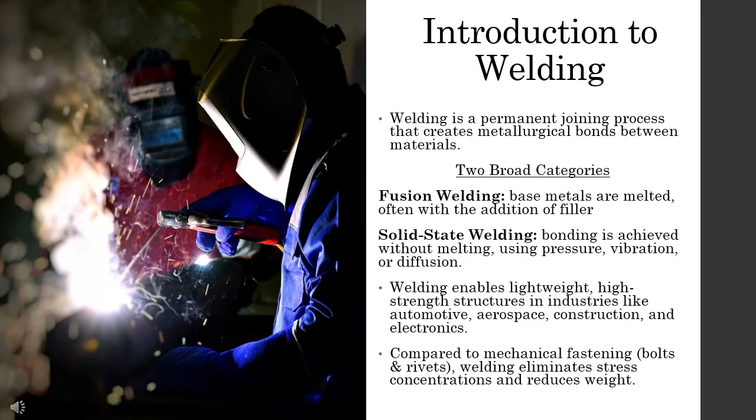The physics of welding revolves around heat transfer and fluid dynamics theory. Heat is transferred via conduction from the welding torch into the base metal, convection within the molten weld pool, and radiation from the arc or flame.

The weld pool behaves like a small lake, influenced by gravity, arc pressure, and surface tension gradients, which is known as the Marangoni effect. Cooling rate is critical, where rapid cooling produces fine grains which are strong but brittle, while slower cooling yields ductile but weaker coarse grains.

Equations help quantify this, where the heat input is Q equals V times I times T, and power density is P equals VI over A. Engineers must also consider the heat affected zone, which often has different mechanical properties than the base metal.

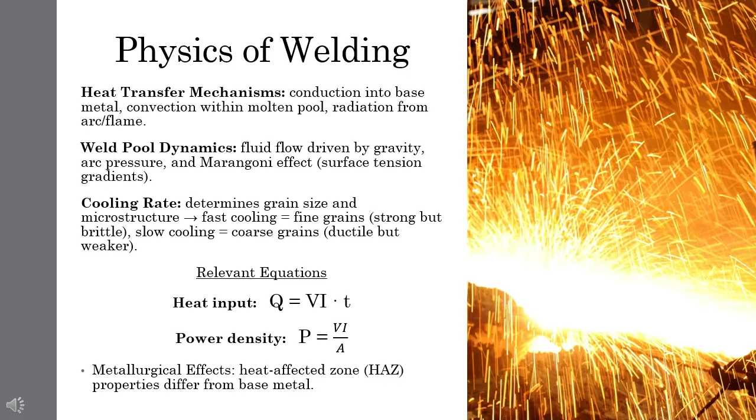Welding processes can be classified by their energy source. Electrical energy powers arc welding processes like stick, MIG, and TIG welding. Chemical energy comes from the combustion of fuel and oxidizer, known as oxy-fuel welding.

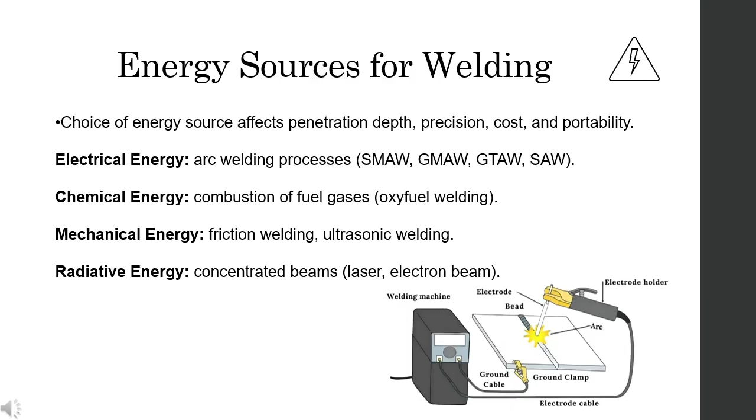Arc welding uses an electric arc between an electrode and the workpiece to generate temperatures between 5,000 and 20,000 degrees Celsius. This melts the base metal and often a filler electrode, creating a very strong joint. Essential components include a power source, electrode, and shielding to protect the molten pool.

Arc welding is the backbone of industrial welding, used in construction, pipelines, and shipbuilding. Its versatility and strength make it the most widely applied category of welding process.

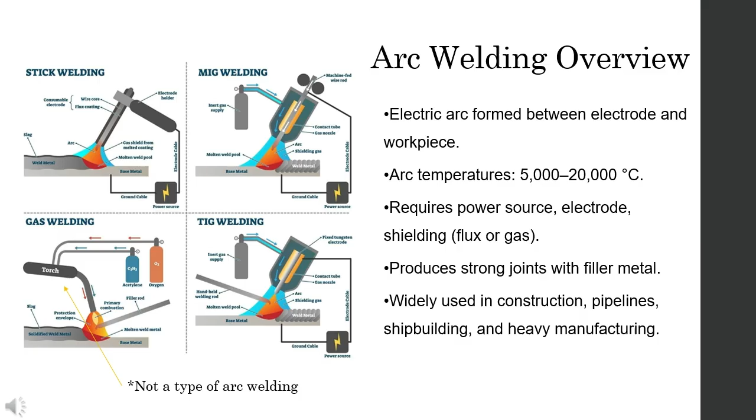Shielded metal arc welding, commonly called stick welding, is a manual process using a flux-coated consumable electrode. The flux decomposes to produce shielding gas and slag, protecting the molten pool from contamination. Its advantages include simplicity, portability, and low cost. However, its limitations are slower deposition rates, the need for slag removal, and reliance on operator skill.

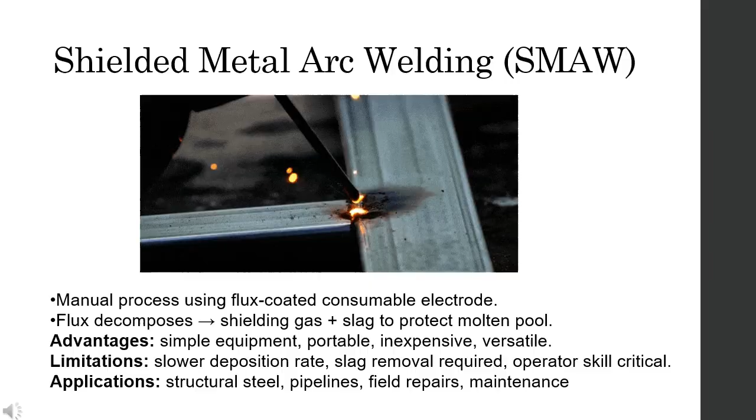Shielded metal arc welding is widely used in structural steel, pipelines, and field repairs where portability is critical. It remains one of the most versatile welding methods despite these limitations.

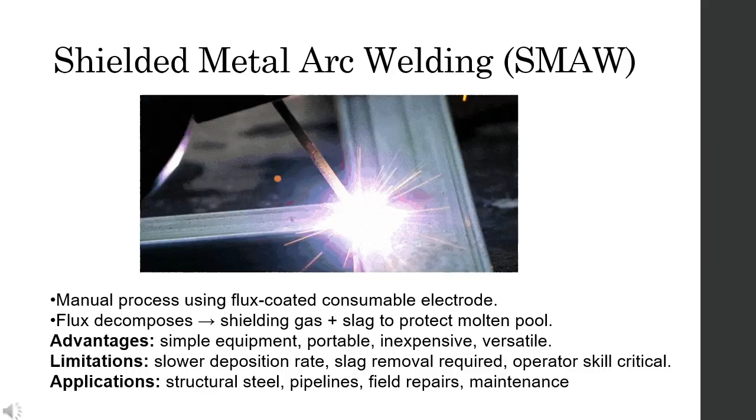Gas metal arc welding, also known as MIG welding, uses a continuous wire electrode fed through a torch with shielding gases applied like argon, carbon dioxide, or helium. Its advantages include high deposition rates, adaptability to automation, and minimal slag. Its limitations are sensitivity to wind, which can disperse the shielding gases, and higher equipment costs.

Gas metal arc welding is ideal for automotive manufacturing and robotics, where speed and automation are essential. It's a clean process that produces high-quality welds in controlled environments.

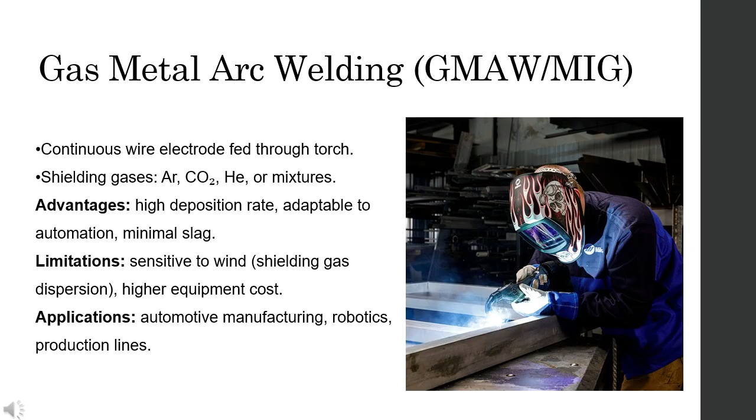Gas tungsten arc welding, also known as TIG welding, uses a non-consumable tungsten electrode with an optional filler rod for thicker joints. It produces clean and precise welds with excellent control. Its advantages include high quality, no spatter, and suitability for thin materials. Its limitations are slower speed, higher costs, and the need for skilled operators.

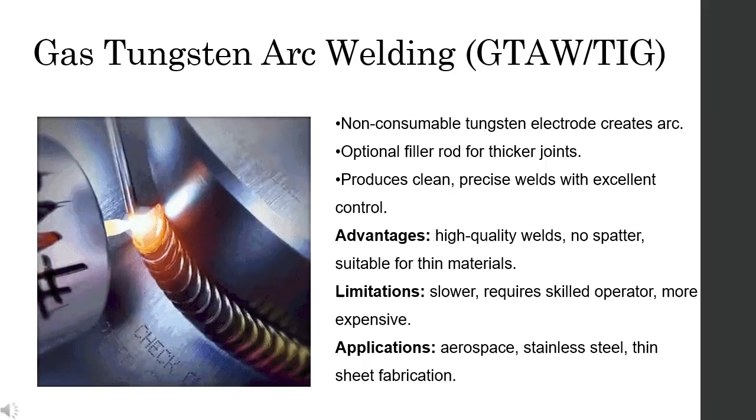Gas tungsten arc welding is critical in aerospace and stainless steel fabrication, where precision and weld integrity are paramount. It's the process of choice for critical joints requiring defect-free welds.

Submerged arc welding involves an electric arc submerged beneath a granular flux layer. The flux shields the weld, stabilizes the arc, and can add alloying elements. Its advantages include high deposition rates, deep penetration, and minimal fumes. Its limitations are that it's restricted to flat or horizontal positions and is less versatile than other methods.

Submerged arc welding is widely used in shipbuilding, pressure vessels, and large structural components where efficiency and strength are necessary.

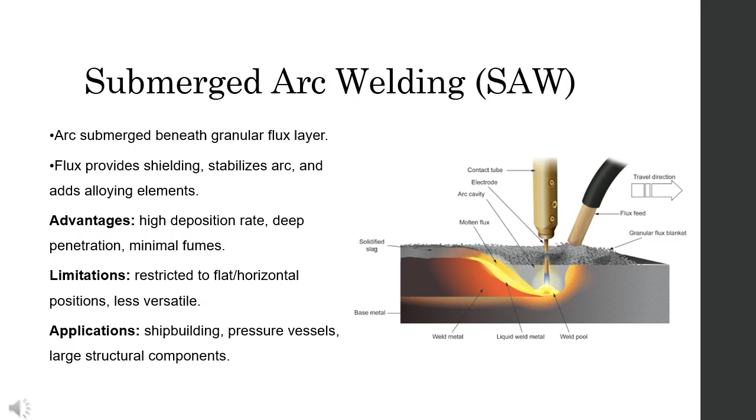Resistance welding generates heat through electrical resistance at the joint interface, with pressure applied during heating to forge the bond. No filler metal or shielding gas is required, making it clean and efficient. It's commonly used for sheet metal joining in mass production applications, especially in automotive assembly lines. The simplicity and speed of resistance welding make it ideal for high-volume manufacturing.

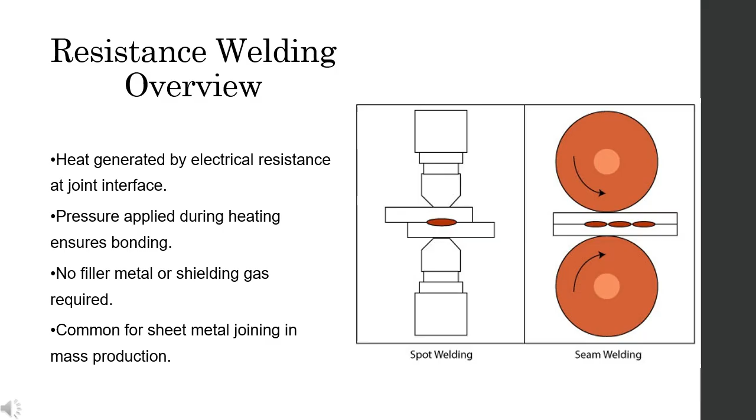Spot welding uses electrodes to clamp sheets or thin objects together while current passes through them. This forms a weld nugget at the interface. Its advantages include speed, cleanliness, and repeatability. Its limitations are that it's only suitable for lap joints and has thickness restrictions.

Spot welding is ubiquitous in automotive body panels and appliances. Those small circular marks on car doors are spot welds, a testament to its widespread use.

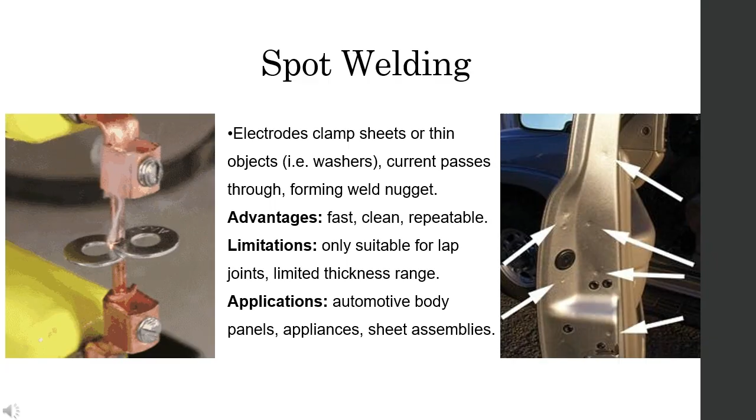Seam welding is similar to spot welding, but uses rotating wheel electrodes to create continuous welds. It produces leak-proof joints, making it ideal for fuel tanks, radiators, and sealed containers. Its advantages include strong, continuous welds and high speeds. Its limitations are that it's mainly suitable for thin sheets and requires very specialized equipment. Seam welding is like stitching metal sheets together, ensuring durability and leak resistance.

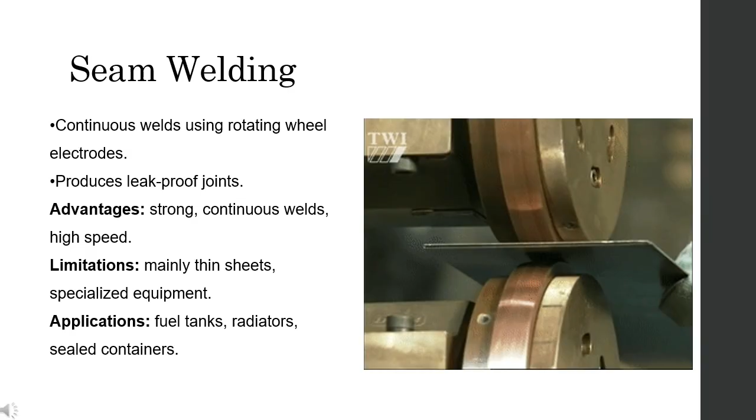Oxy-fuel welding relies on the combustion of fuel gases and oxygen to produce a flame that melts the base metal and filler rod. Flame types include neutral, oxidizing, and carburizing, each affecting the weld's quality.

In oxy-fuel welding, flame control is critical. Too oxidizing can cause brittleness, while too carburizing can introduce carbon contamination into the welds. Oxy-fuel welding is a versatile and portable welding process used in repair work and smaller scale fabrication applications.

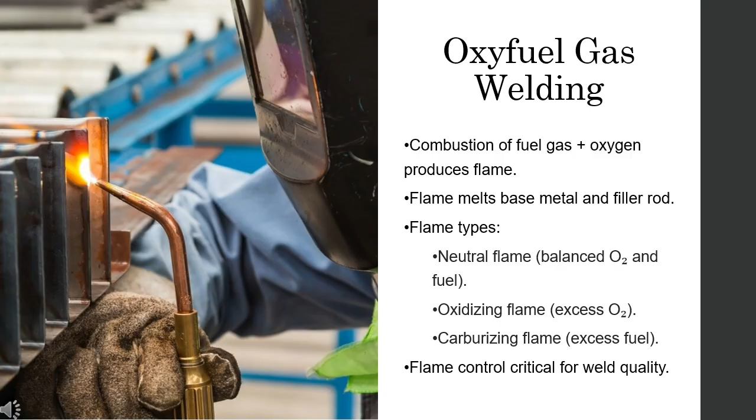Oxyacetylene welding is the most common type of oxy-fuel welding, where acetylene is the fuel. It uses an acetylene and oxygen mixture to produce a flame of around 3,500 degrees Celsius. Equipment required is a torch, regulators, hoses, and safety gear.

The advantages of this welding process are its portability, versatility, and relatively low cost. The limitations are relatively slower speeds, less precision, and greater distortion compared to more modern welding methods. It's widely used in repair shops, art metalwork, and small-scale fabrication where portability and simplicity are required.

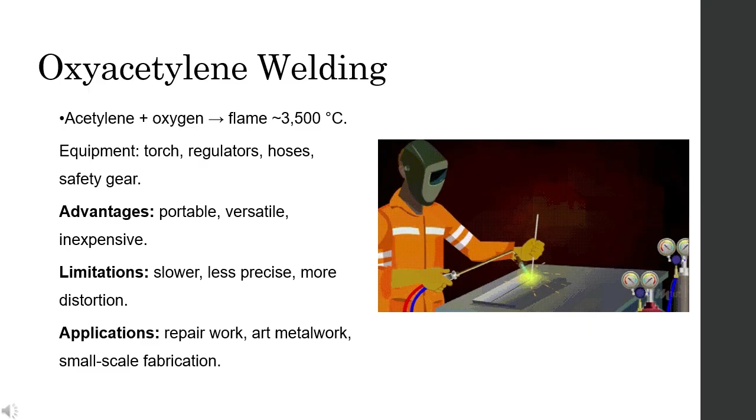Laser beam welding uses concentrated light energy to melt materials together. This achieves a high degree of precision, deep penetration, and low distortion. Electron beam welding uses a high-energy electron beam inside of a vacuum, which achieves an extreme energy density.

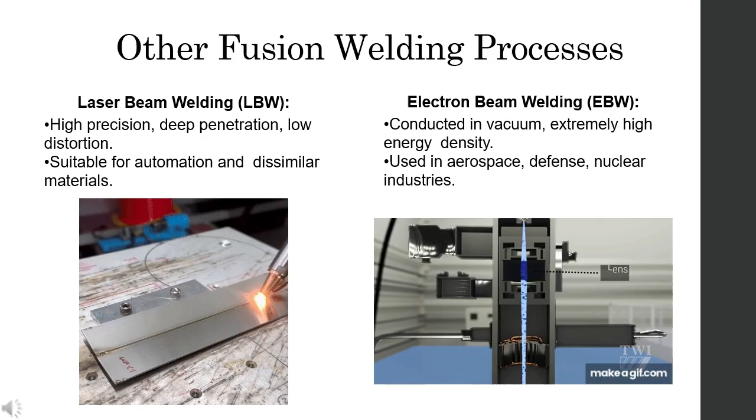Both processes allow welding of dissimilar materials and are used in aerospace, defense, and nuclear applications. They represent advanced welding technologies that offer unmatched precision. However, they require specialized equipment and environments that are difficult to attain, making them unsuited for most welding jobs.

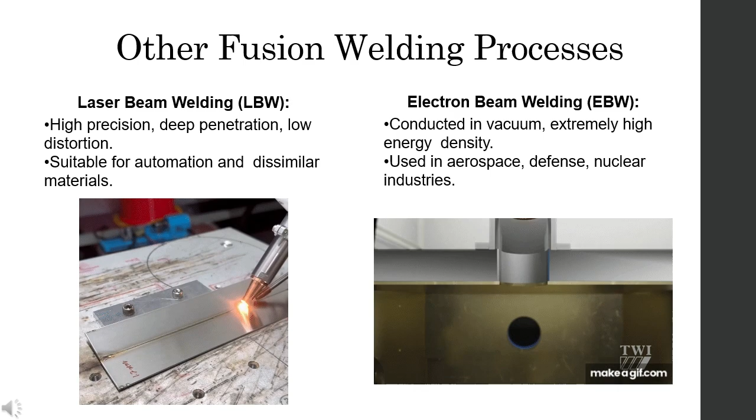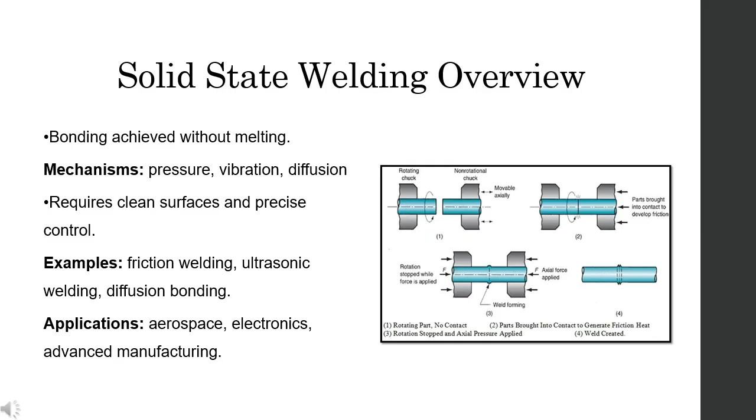Friction welding uses rotational motion and axial pressure to generate heat, which softens the interface and forges a bond between the materials. Its advantages include strong, defect-free joints that do not require the use of filler. Its limitations are that it's restricted to rotational parts and requires very specialized equipment.

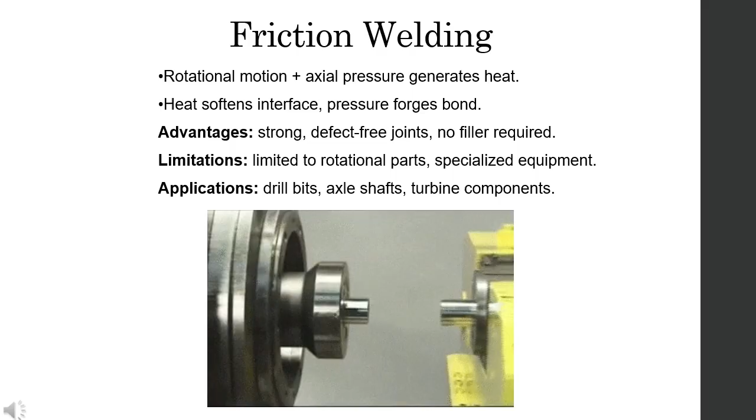Applications include drill bits, axle shafts, and turbine components. It's ideal for cylindrical parts where strength and reliability are paramount.

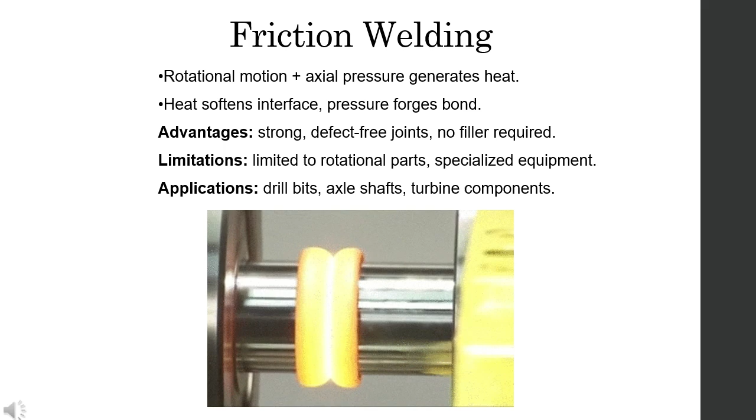Ultrasonic welding applies high-frequency vibration, typically 20 to 40 kHz, and pressure at the joint to disrupt surface films and enable intimate contact. This creates a solid-state bond without the need of melting. The vibratory energy is localized at the interface, so bulk temperatures remain low, which minimizes distortion and thermal damage to adjacent components. It excels with thin, non-ferrous metals like copper and aluminum, foils, and thermoplastics.

In metals, it relies on plastic deformation and interfacial diffusion, while in plastics, it briefly softens the polymer at the faying surfaces. Typical benefits include rapid cycle times, clean operations with no flux, filler, or fumes, and precise energy control via amplitude, time, and force settings.

Common applications include wire terminations, battery terminals, microelectronic packages, catheter assemblies, and sealed housings in consumer electronics. When creating ultrasonic joints, you must focus on electrical resistance of the conductors, weld parameters—again amplitude, time, and force—and the anvil or sonotrode geometries.

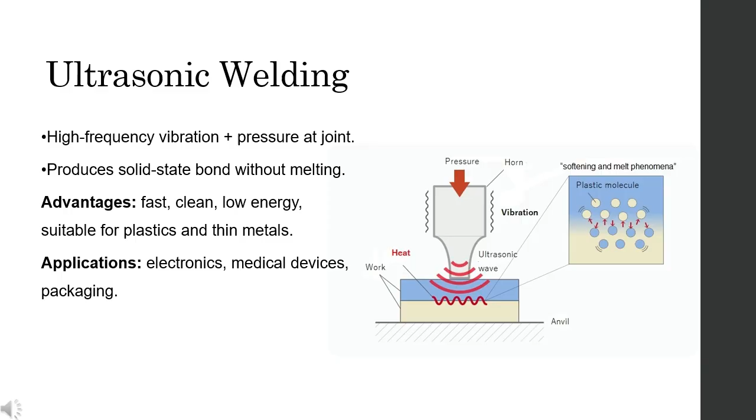When selecting the appropriate welding process, consider joint type and geometry. Spot and seam welding are optimized for lap joints and sheet assemblies. Gas tungsten arc welding is ideal for thin sections and high integrity welds.

Submerged arc welding and laser/electron beam welding suit thick sections or deep penetration with automation. You can then weigh production factors like deposition rate, positional capability, equipment complexity, and environmental factors.

In practice, automotive bodies lean on resistance, spot, and seam welds. Aerospace uses gas tungsten arc welding and laser/electron beam welds for their insane precision. Heavy industry adopts submerged arc welding for their throughput and integrity.